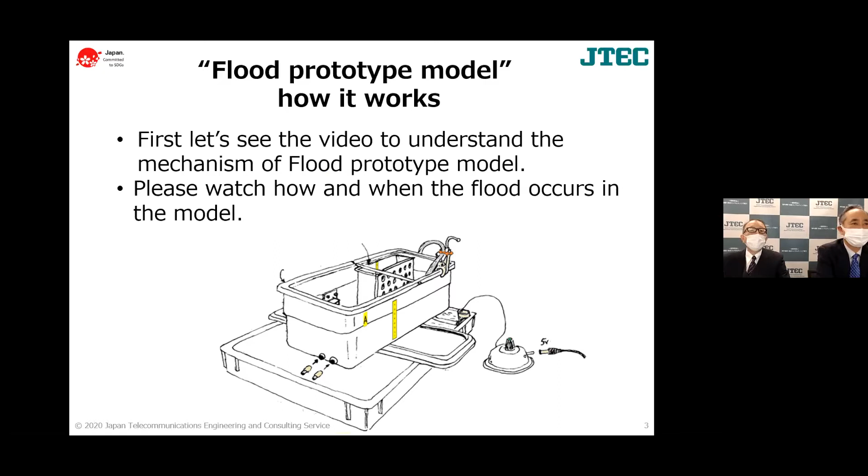Firstly, please watch the video showing the mechanism of the flood prototype model.

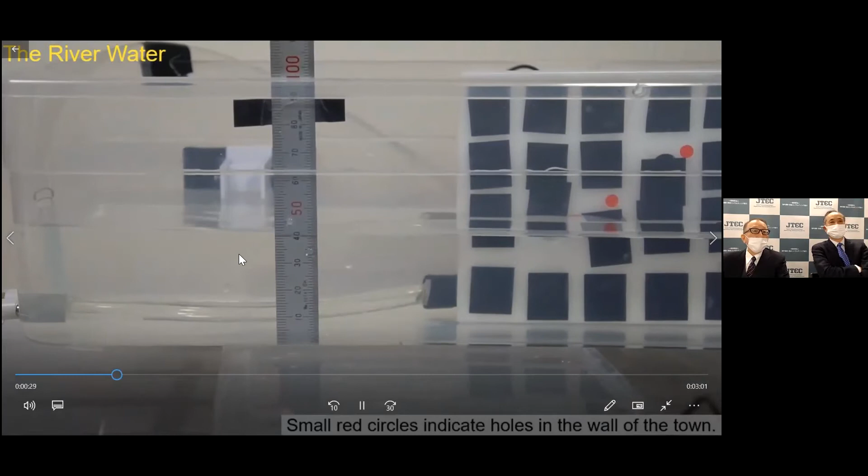This video shows how we make flood in our prototype model. The water from this pipe goes down to the river. This river tray is the inner concept of a river, so you can measure the water level from this. The water level is increasing gradually this way.

Please look at these red marks. This is a wall to the town street, and there are small holes here, here, and there—3 centimeters from the ground, 4 centimeters, and 5 centimeters. From those holes, water will go into the town street.

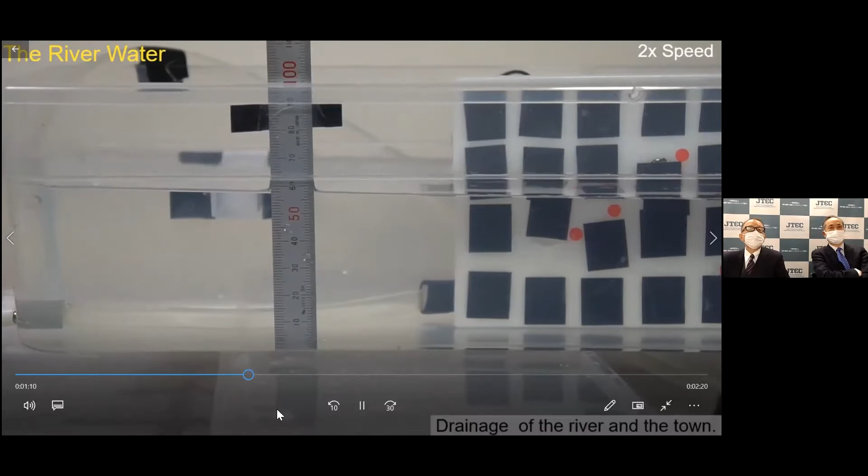Now the water levels, if you see—here's the drainage. We have a drainage for both the river and the town streets. We will explain later how we set this drainage. This pipe is connected to the city street.

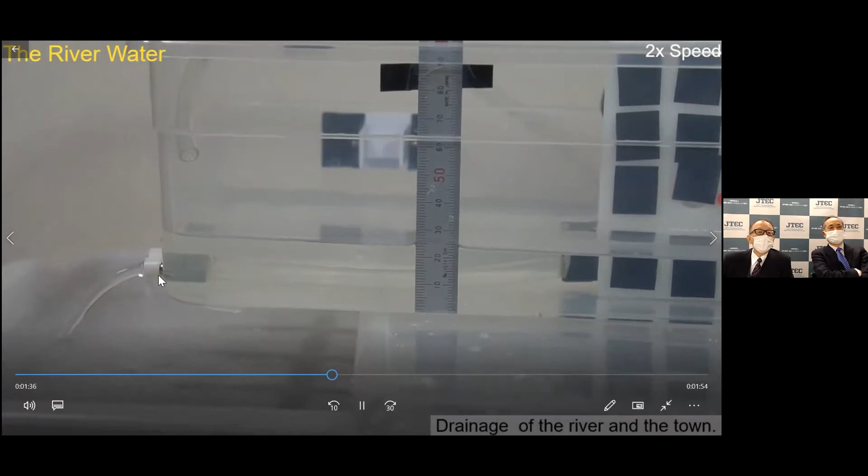This is the inside of the town streets. Here are walls and holes. And this is a sensor, a tilt sensor, for catching the flash flood.

The water level of the river is increasing. Then please watch here—the river water is now going into the towns. In this demo, we put the tilt sensor to detect the flash flood this way.

Now going to the second hole, third one. Please regard this as a small real world which we made to get data from. Now the water level is decreasing by opening the drainage. Here and here, we put a water level sensor later.

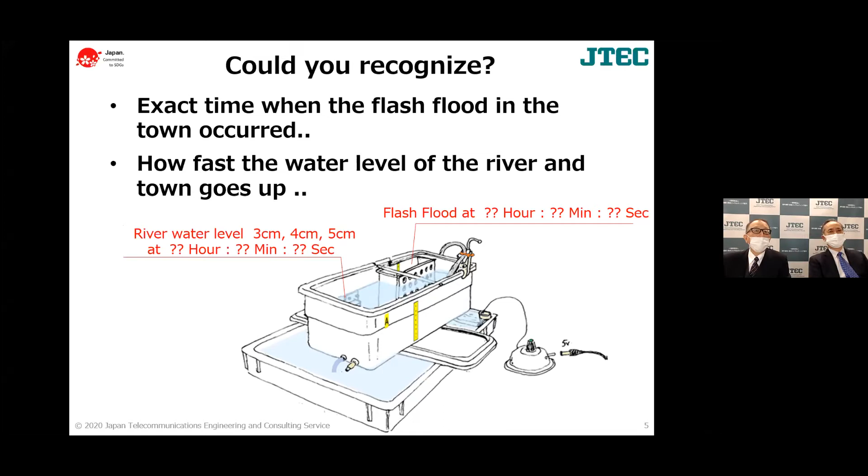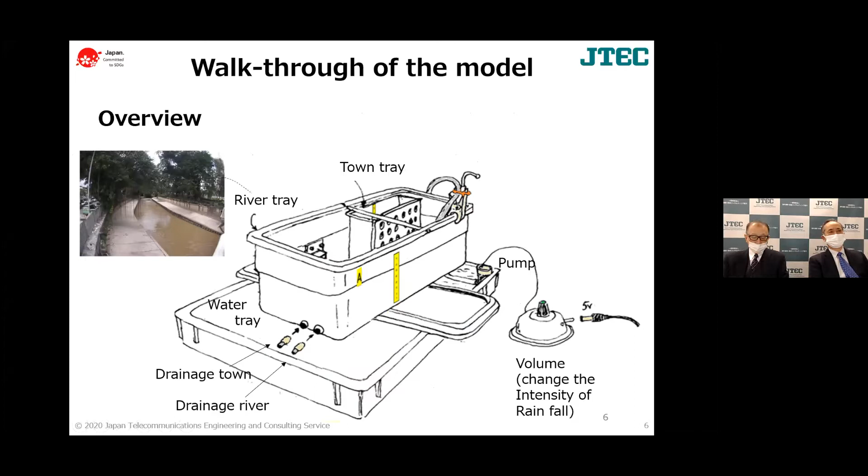Let's review the mechanism. River tray stands for river, and town tray stands for streets in towns. By the volume of pumping, we can increase and decrease the water supply to the river tray. By putting in or taking out the plugs, we can open or close the drainage for river and town.

Please remember the video. There are two trays. In the base, a water tray—we keep around 3 liters of water here. The water goes down to the town tray and river tray through this pipe. Then the water in the river tray comes into the town tray, and through the drainage, water goes out and returns to the water tray. So we don't have to worry about overflow of water in this model.

Here's the pump. We bought a pump for aquariums, and by changing the volume, we can change the intensity of this pumping. Look at the pictures—river tray stands for rivers, and town tray stands for town streets. Please imagine those situations in your mind.

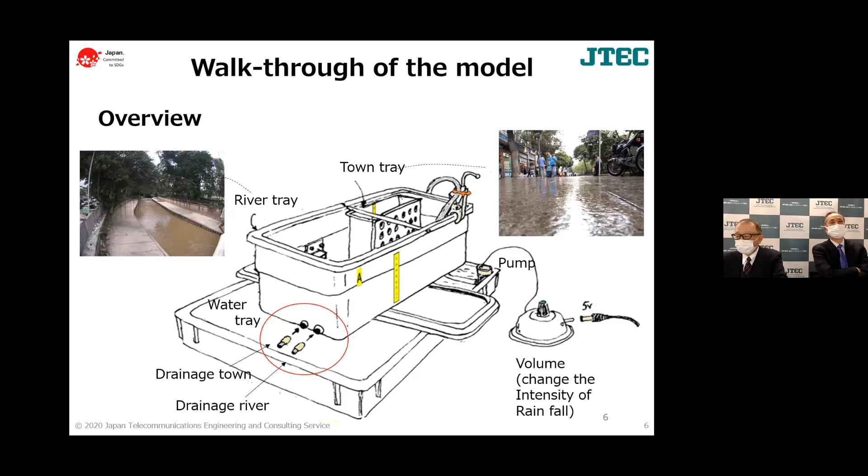To set the conditions of embankment, we can open the holes a little bit by removing the vinyl caps covering the holes. So we can change the holes in the embankment by changing the place of the hole, changing a vinyl cap.

But to make a comparison between the patterns, we use the fixed place of hole in this model.

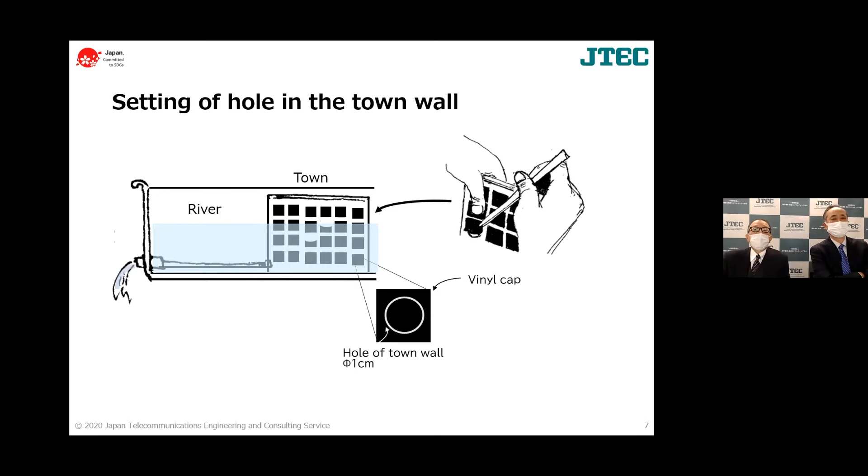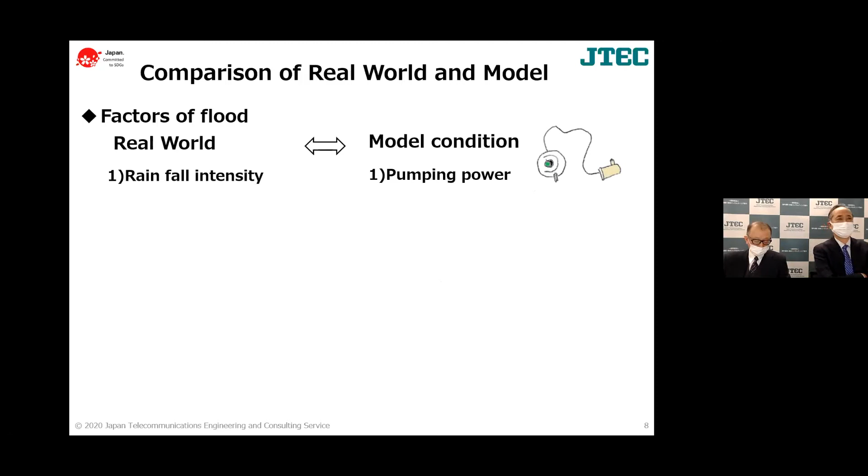I would like to compare factors of flood in the real world and in the model. This comparison shows the linkage between the factor of floods and parameter of the flood prototype model. Rainfall intensity is linked with pumping power, height of embankment linked with height of town wall hole, and water flow capacity of river and town are linked with drainage of river and town.

By measuring data 1, 2 and 3, we can use the data for AI, such as binary classification analysis and regression analysis for predicting flood occurrence.

By setting the sensors and sensor network, we can monitor the flood status time to time with data. IoT is a tool to present the physical status of things in the cyber world with digital data.

In this hands-on training, sensors are not connected via Internet, but we are using wireless data transmission, and you can learn how to convert physical status of river and town street water level to real-time cyber digital data, and learn the flow of data.

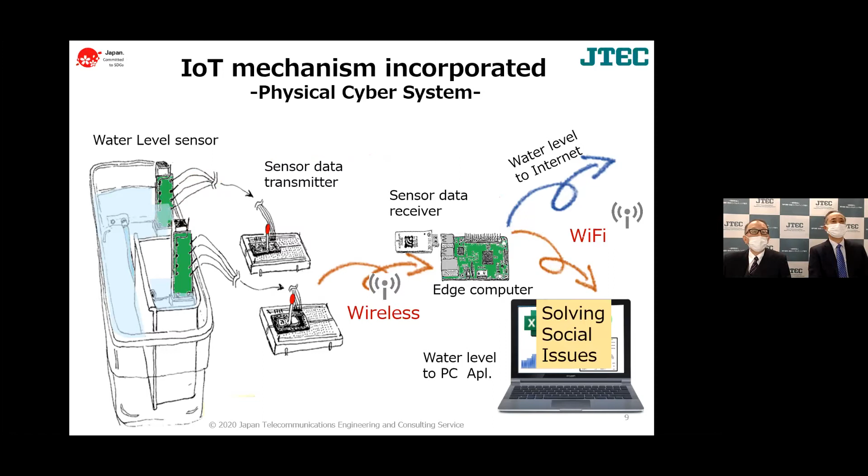So, by using a camera, let us see the actual sensors as a hands-on training. Please look at the video on JTEC APTA. Click the right side, then put pin, so you can see the larger size of the video of the prototype model.

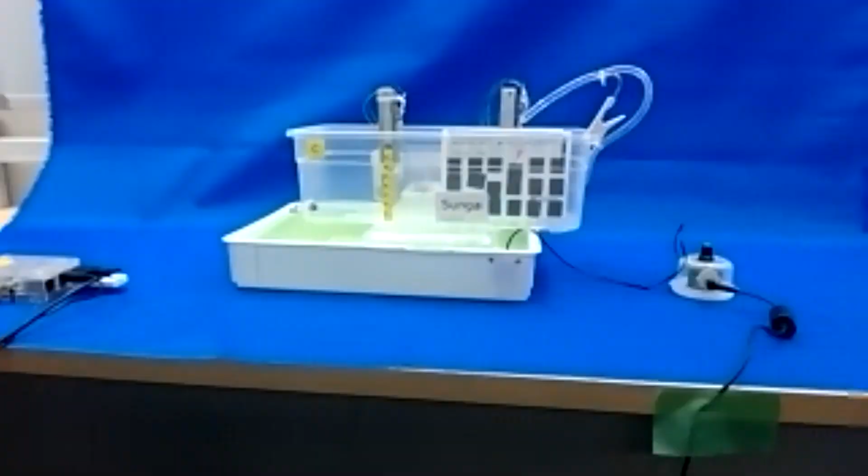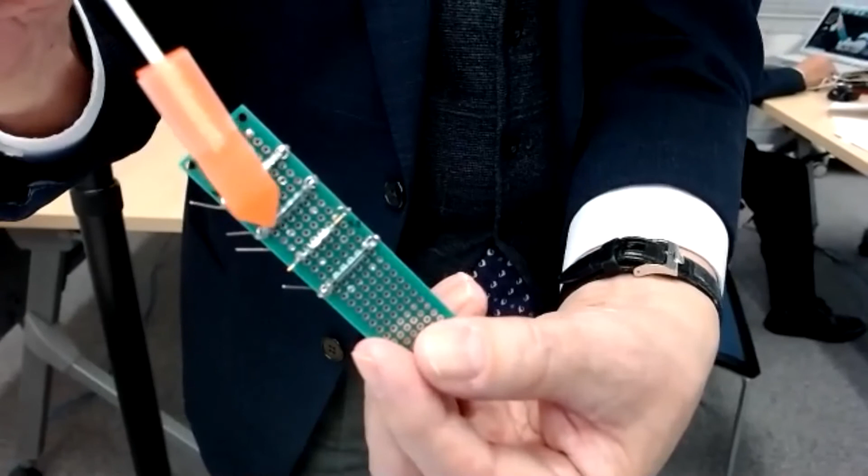Can you see the sensor? This is the reed switch. So this is always number 1, 2, 3, 4.

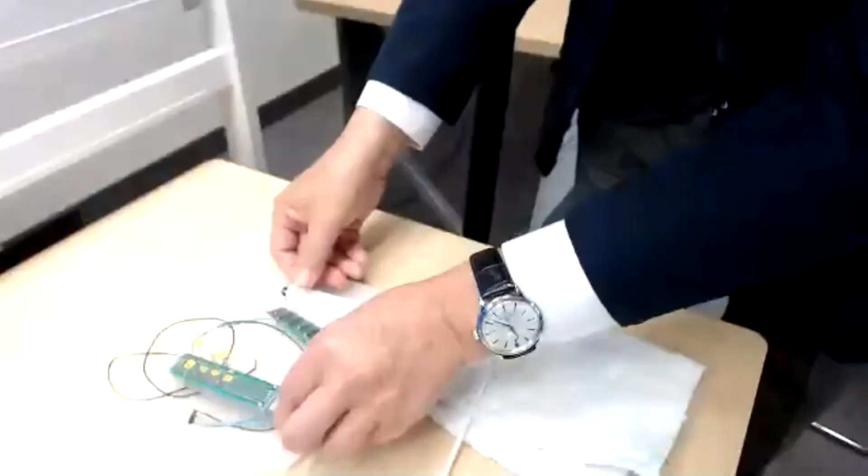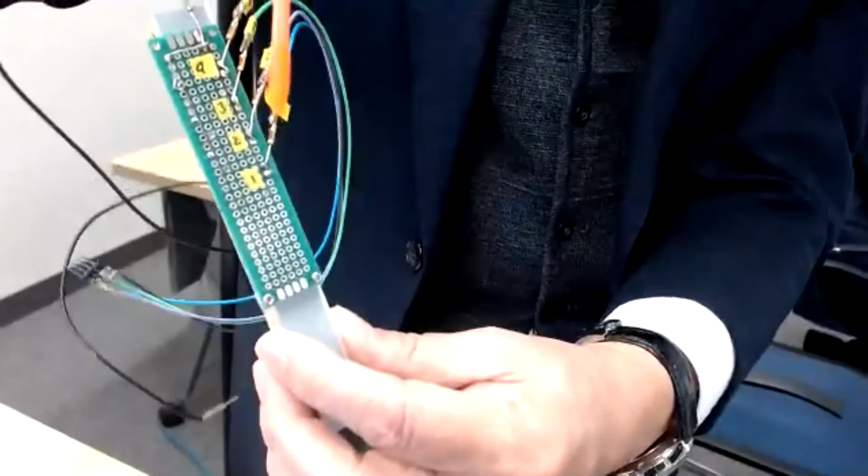So this moves on top of the float, and this is a magnet. The magnet will switch the sensor one by one. When this level is between sensor 3 and 4, we designed it to show 3.5 centimeters on the monitor. This is the sensor itself, switch equipped in the model. There's a place for sensor 1, 2, 3, 4, connecting the signal with this line. Those are the sensor mechanisms.

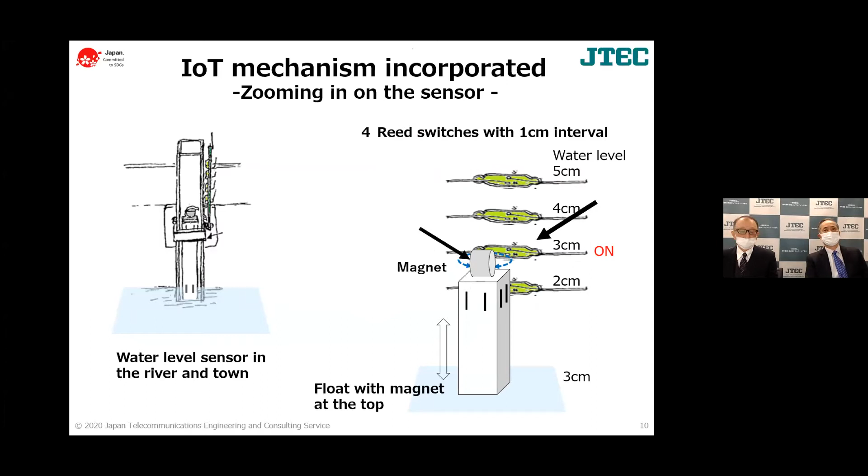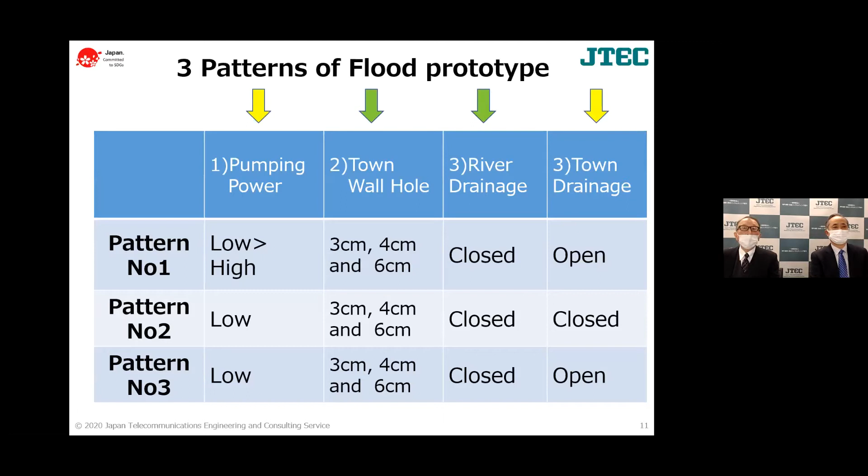Let's see how we set these parameters through the live camera.

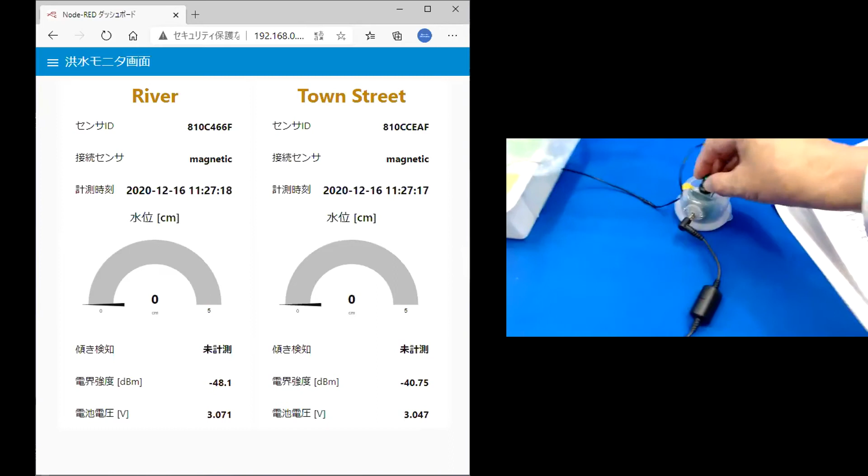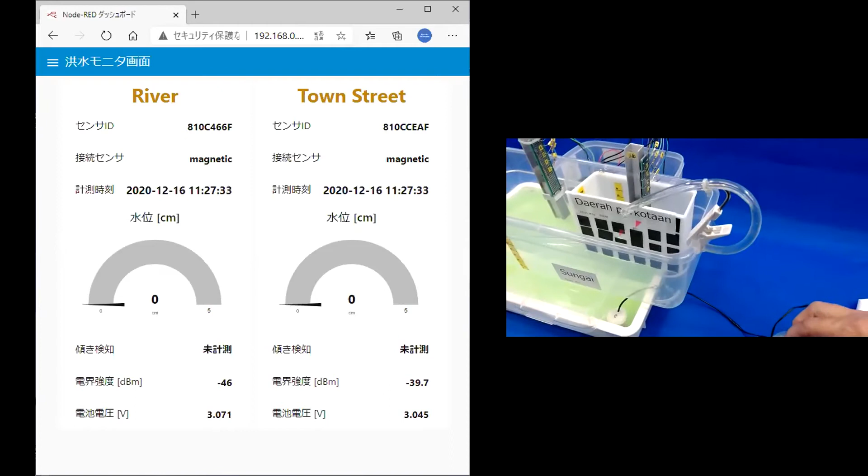To set the pumping power, we use this switch on, then water pumping, either manual or solar - this is a water pump. The town wall hole is here, those holes, we can change the condition.

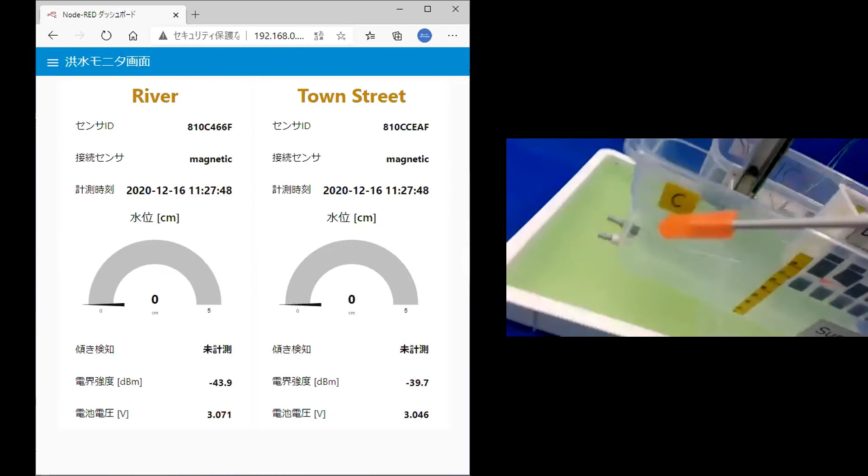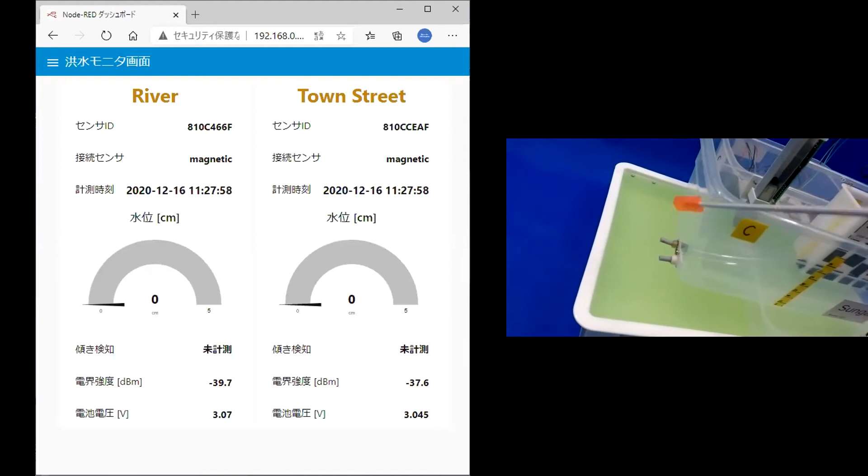And the next one is river drainage, a drainage for river, this one. This drainage is connecting to the river, and the other one, this drainage is connecting to the town street. So we can change those conditions to have various patterns of flood model.

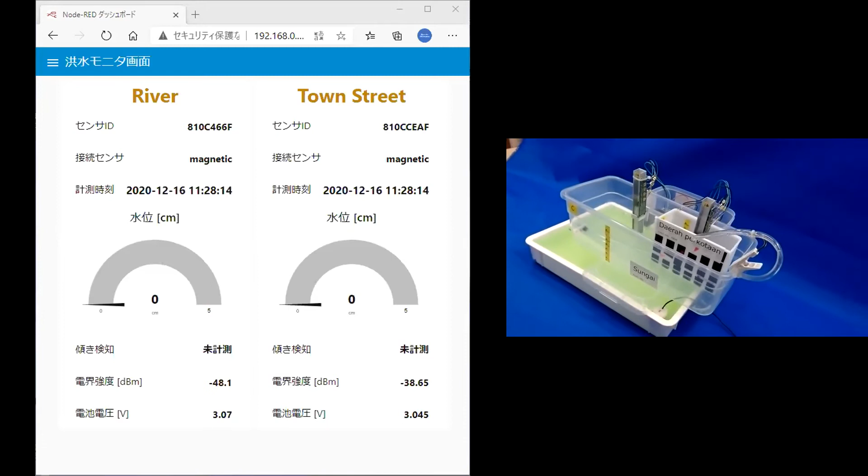Okay, thank you. So let's go to the next slide.

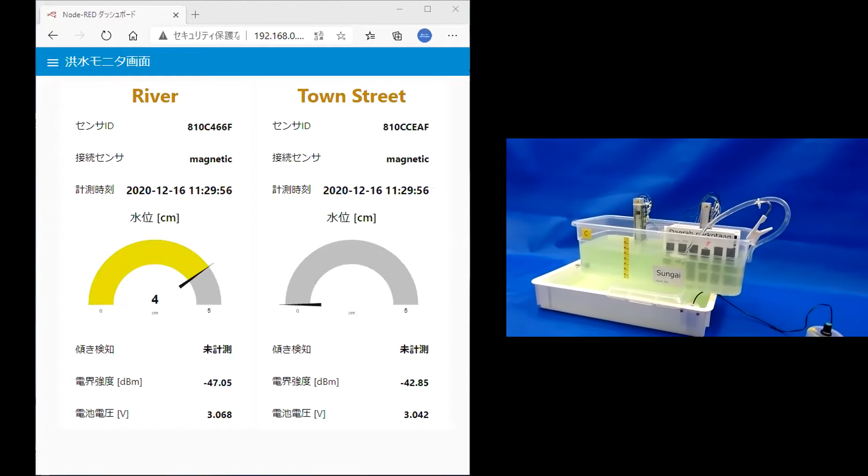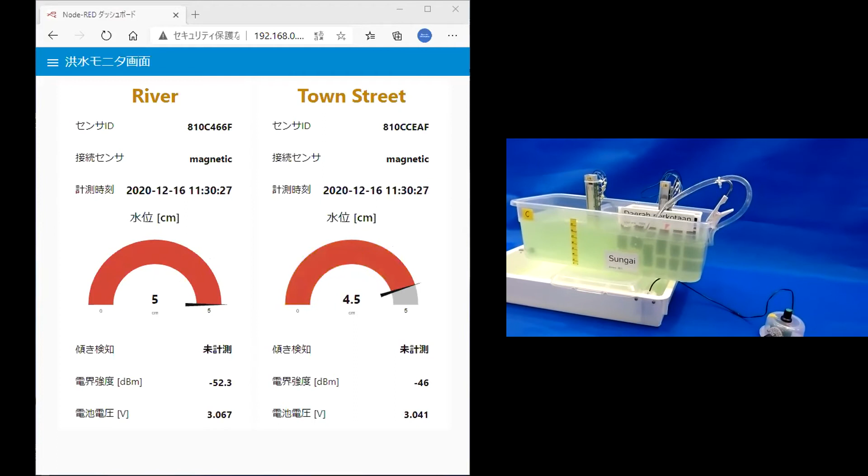Okay, thank you for watching the live demonstration. Let's close the current videos, please. Finally.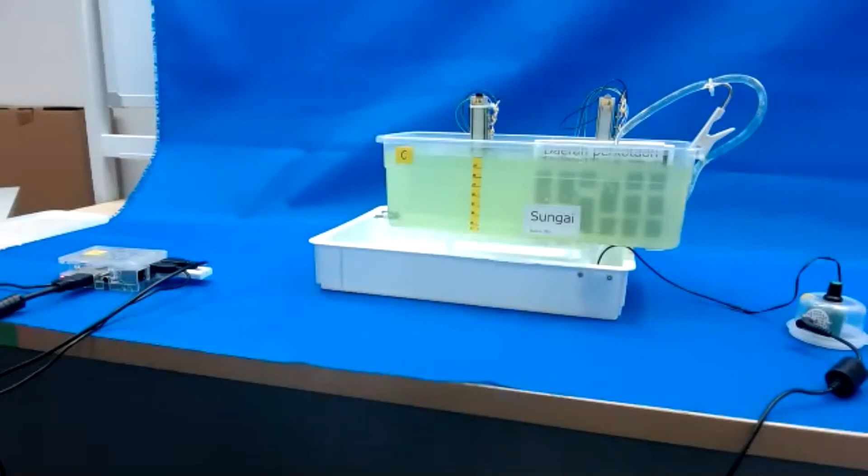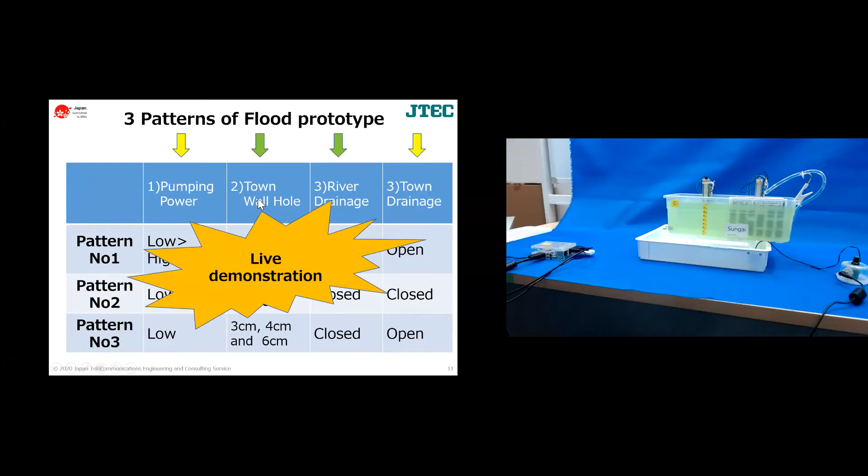If you record the time of water level, you can calculate the speed of rising water level by elapsed time. We will analyze the speed of water level at the exercise with Excel. Do you have any question?

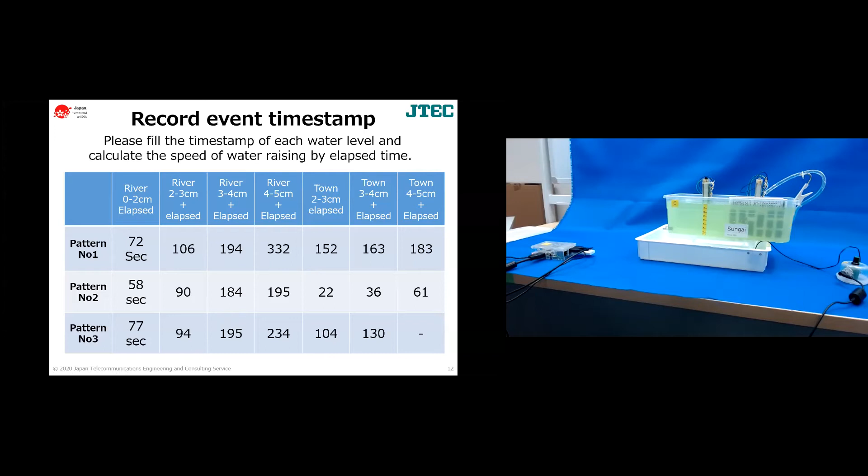Please watch the experiment for pattern number 1. Please watch how the water levels go up and down and how the monitor display shows the water level changes. After watching the video, we would like you to make a line chart with the data of pattern 1.

We showed the live demonstration, but some of the participants may not have watched how it works, so we prepared the videos for this.

There's no narration here, but on the left upside, there's a monitor screen of water level in the river and town street. On the right upside, these are pictures of the inside of the town streets. Now we start the pumping and water comes into the river.

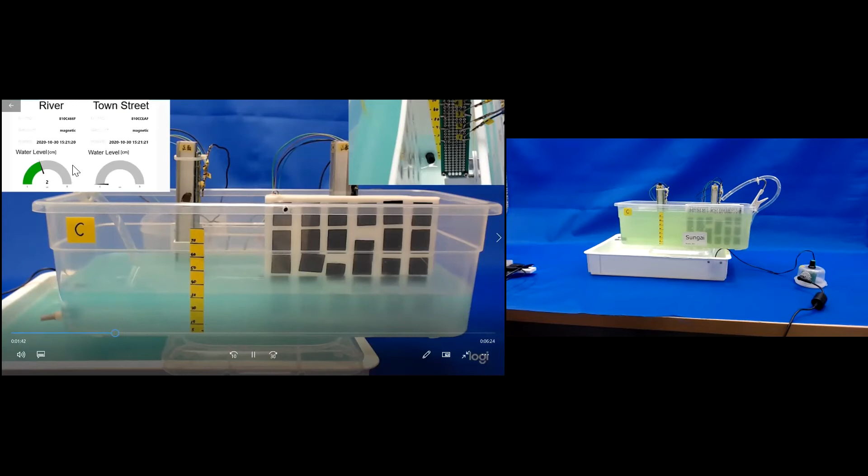No water into the town street right now. The water goes into the town street when the river water level is 3.

Please look at the leaking waters, and this float coming up gradually.

This may be the second water leaking to the town street. Now the sensor in the town street catches the water level too.

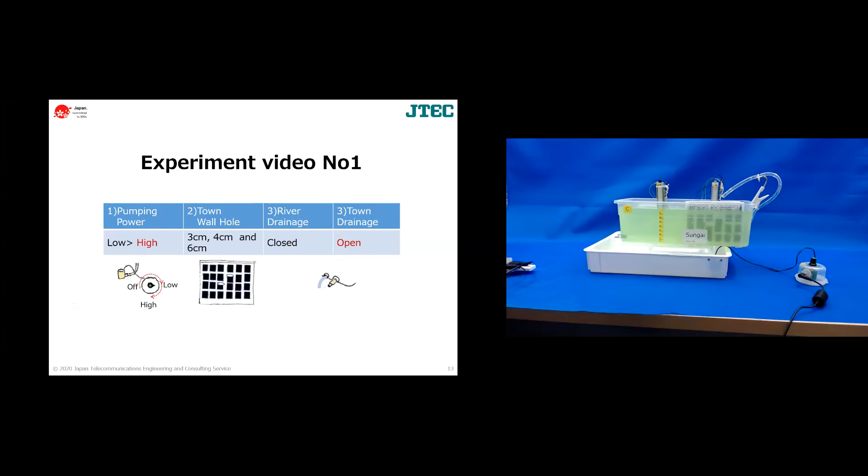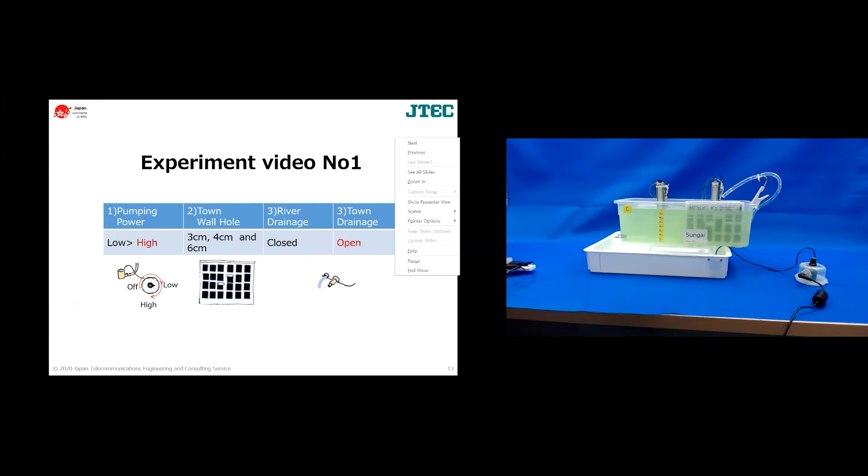Please watch the experiment for pattern number 1. Please watch how the water levels go up and down and how the...

Please try to use the Excel file to make a line chart for pattern 1 and visualize the collected data. Firstly, let's try to make line charts with the Excel file we sent beforehand.

Please open the Excel file and try making the charts for pattern 1.

As we informed beforehand, we are going to do a practice or exercise using the Excel files which we sent.

Just a moment. This is the Excel file which we sent you. I'll show you the example.